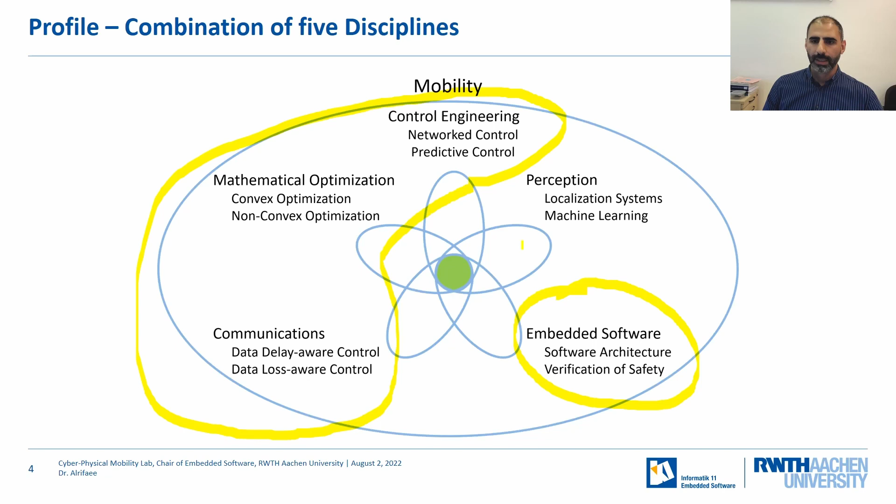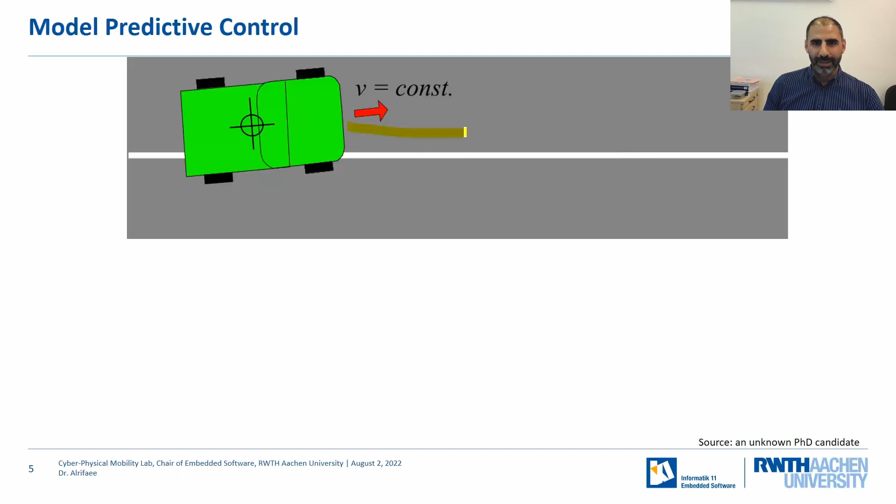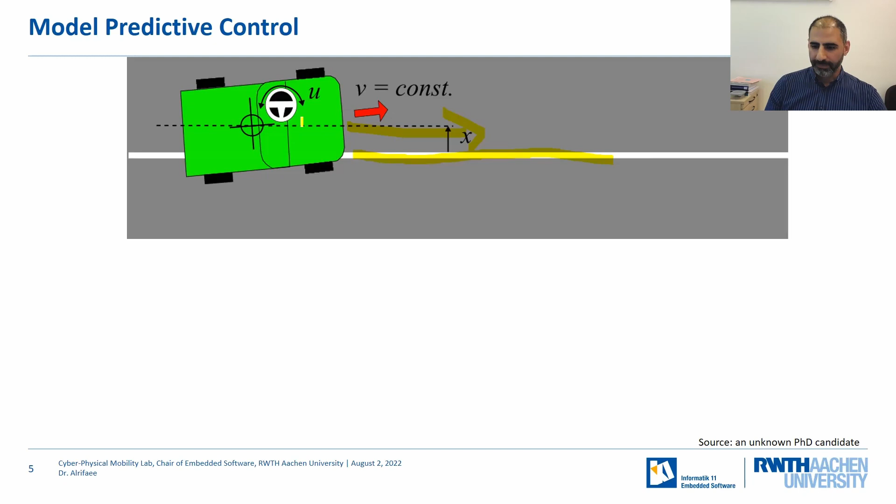Yeah, let's start. So I would like to introduce the idea of model predictive control very shortly to you. So imagine there is a car driving in this direction with a constant velocity, and it has to follow this line. And we can measure the difference between the current position and the reference line, and we can use the steering angle to get the vehicle to the reference. What we can do is classical control or predictive control. In classical control, it is similar to drilling a hole in the floor of the vehicle and looking where we are now and correcting the steering angle.

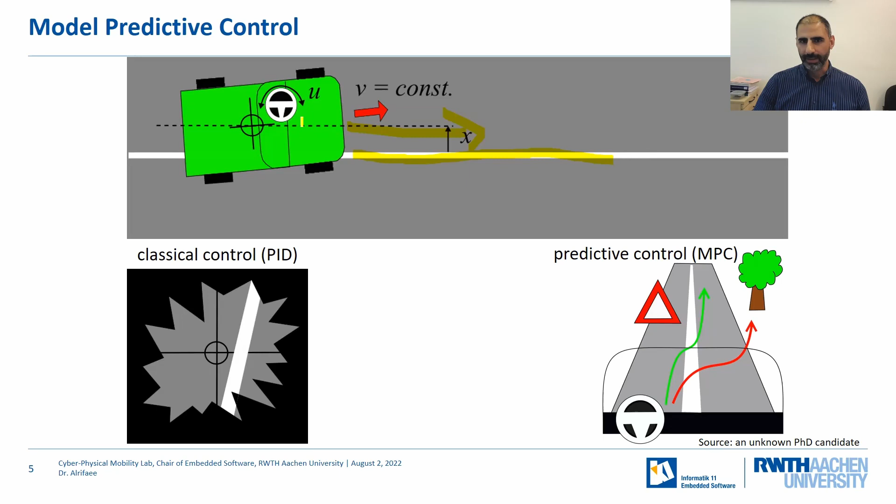And in predictive control, it's more like what we do as humans. We look out of the windshield and we don't drive to the tree. We drive on the lane and we avoid blocked lanes and drive on the free lane. This is a very short introduction to model predictive control. So formally, we have a reference trajectory. We have past measurements, and we use a model to predict the future of the system. And the model is usually a mathematical model. In many cases, it is a differential equation system.

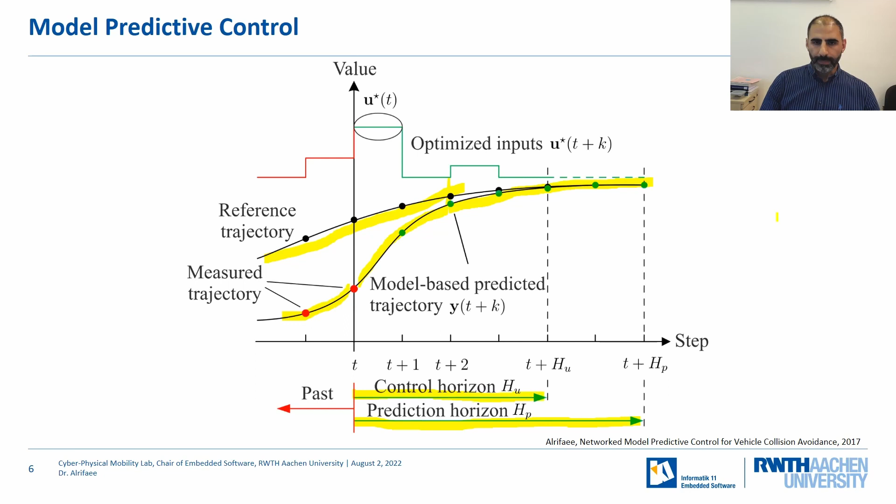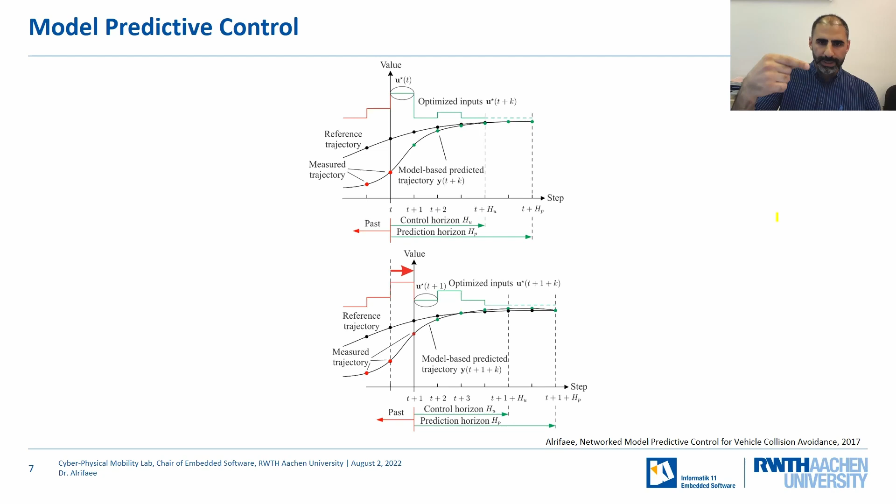The horizon in which we predict is called the prediction horizon, and we formulate an optimization problem and minimize the difference between the reference trajectory and the predicted trajectory using the control input, and we optimize the control input inside what we call the control horizon. What we have seen is an open loop control problem. It is not closed loop control, and to close the loop, we conduct the MPC at every time step.

And I would like to show you now a situation which you know from everyday life, especially after COVID now, in malls or in city centers when they are crowded. Maybe you have seen it, maybe you have experienced it by yourself. Two pedestrians approach each other, avoid each other once, avoid each other twice, and at the end of the day, they may collide or not. So humans are able to resolve such a situation. But how does it work? If you have been to Japan, you can go to the Shibuya crossing and observe how it works in such a crowded intersection.

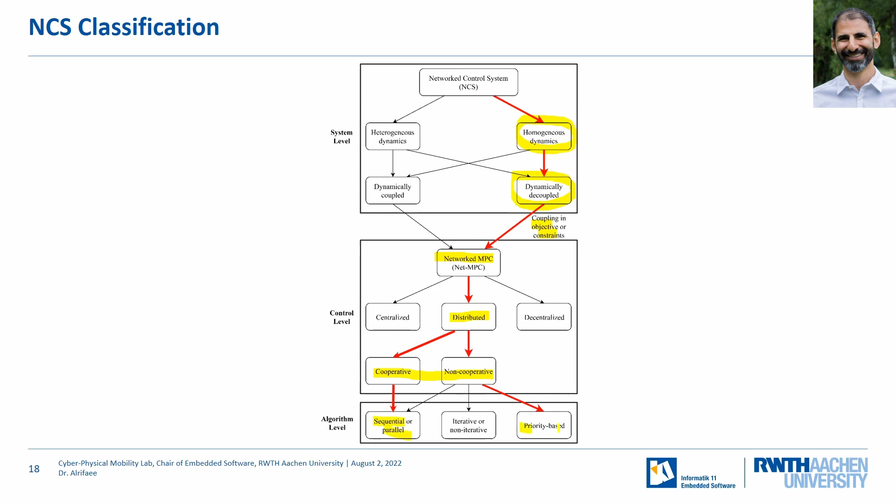So, and we study cooperative and non-cooperative strategies. A note: cooperative and non-cooperative, the terms here come from game theory, and in terms of trajectory planning, non-cooperative strategies also result in cooperative trajectories, but here the terms come from game theory. And we look also on the algorithm level, on different algorithms, how we can get to good solutions.

Now we have formulated the MPC and put the network terms into it. How can we formulate now the optimization problem? We can formulate it as a centralized MPC, where we have a center where we collect the information of all agents, solve the optimization problem, communicate the results to the agents, and they apply. So this is not applicable in practice. It has a high computation time, and we have a single point of failure in the center. Nevertheless, we solve such an optimization problem to use it as a benchmark for comparing different distributed MPC strategies.

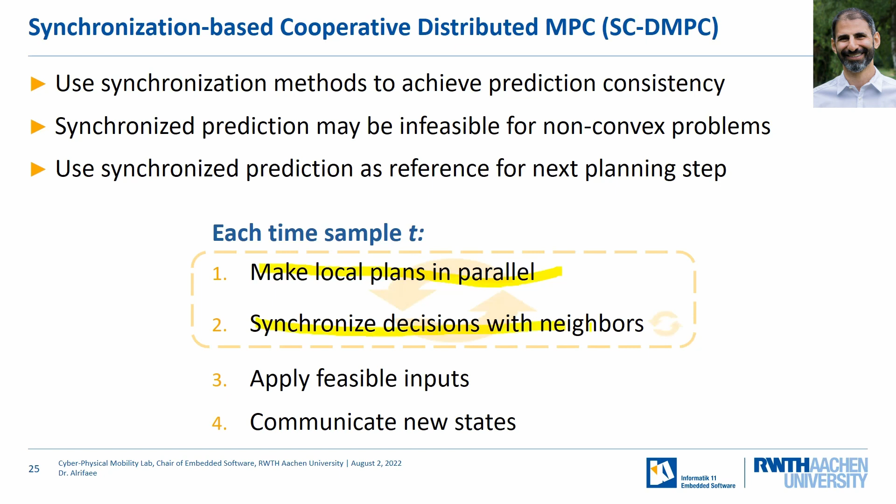Max also studied the graph structure, studied graph properties, which conditions should be fulfilled to get a feasible solution and to reduce the computation time, and came up with an idea of also creating a coupling topology if one doesn't exist, using non-cooperative games. So you can read more about it in this paper presented at the IV this year.

Cooperative DMPC could produce good solutions, but there is also another option which reduces the computation time further, the non-cooperative DMPC. We decompose the centralized MPC into smaller optimization problems. Each agent considers its own objective, own constraints, and the coupling objectives and constraints with neighbors, and they communicate their optimized predictions. So an agent tells other agents, this is my plan, and they use this plan to consider this agent. And this is a greedy algorithm because each agent considers its own objective and only a prediction made by other agents.

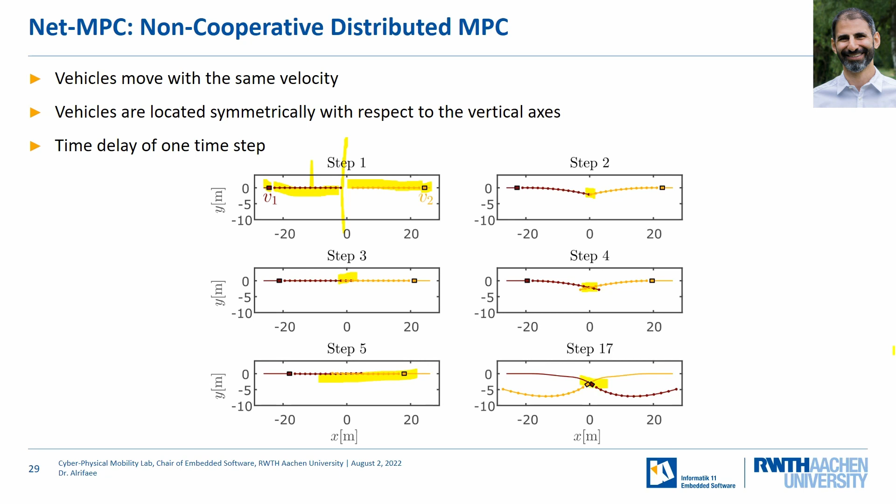What can we do? We studied the graph structure, and we observed that the graph structure of such problems is cyclic. So it contains cycles, which means that we consider exactly the same coupling in both agents. And we showed that cycles in coupling graphs lead to loss of prediction consistency property.

And what can we do to resolve this problem? We can solve in sequence and iterate till we get to a solution. It comes with high computation time. And our proposed solution is the priority-based non-cooperative distributed MPC. I would speak about priority MPC, to simplify this term.

If the network is time invariant, we're done, and we can solve the optimization problems in parallel. But if the network is time variant, we need to solve in sequence, and then we get again high computation time. What can we do to reduce the computation time in sequential computations?

We observed that the priorities generate a partial order. We can convert the partial order into a topological order, and this is only possible if we can prove that our graph is a directed acyclic graph. So we could prove that the graph generated using priorities is a directed acyclic graph. And what can we do with this information? The good news, our topological order is not unique because the graph is not fully connected. So we can use this to reduce the computation time.

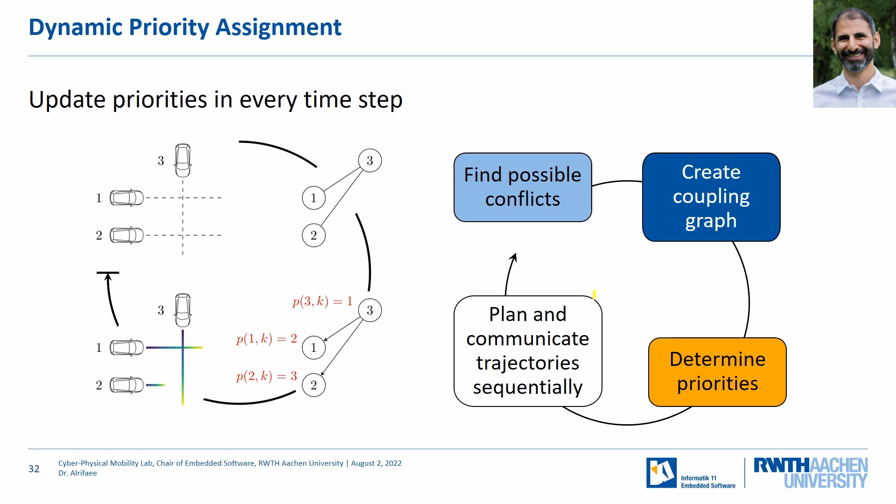And Patrick presented his solution or is going to present it at the ITSC this year. And the main focus of his work is how can we guarantee or study the recursive feasibility of the networked control system. Recursive feasibility means if we get a solution at a time instant t, what can we say about the solution at time step t+1? Can we guarantee to get a solution at t+1? How good is the solution there?

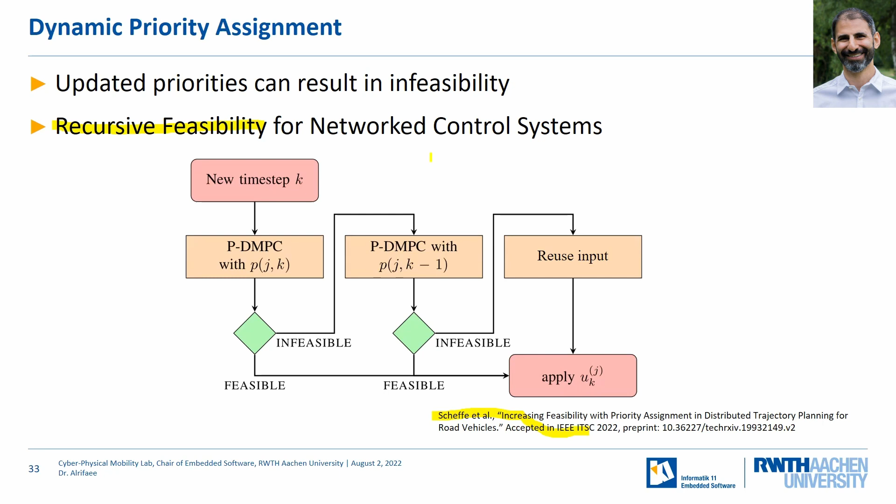And this is defined as the recursive feasibility. The recursive feasibility is well known in the area of MPC. There is the question in a single MPC, I get a solution at a time instant t. Can I guarantee to get a solution at a time instant t+1? And he extended this definition to networked control systems.

Yeah, we found out that we can distribute the priorities in another way to reduce the levels, but also we can redistribute the priorities to reduce the incoming edges. The incoming edges are in the constraints in the optimization problem, and it's well known that the number of constraints in an optimization problem increases the computation time.

So Patrick studied this and came up with the idea of graph coloring, and he proved in his publication, which is still in preprint, that it is equivalent to graph coloring. Graph coloring is a well-known problem, and we can use heuristics from the field of graph theory in our problem.

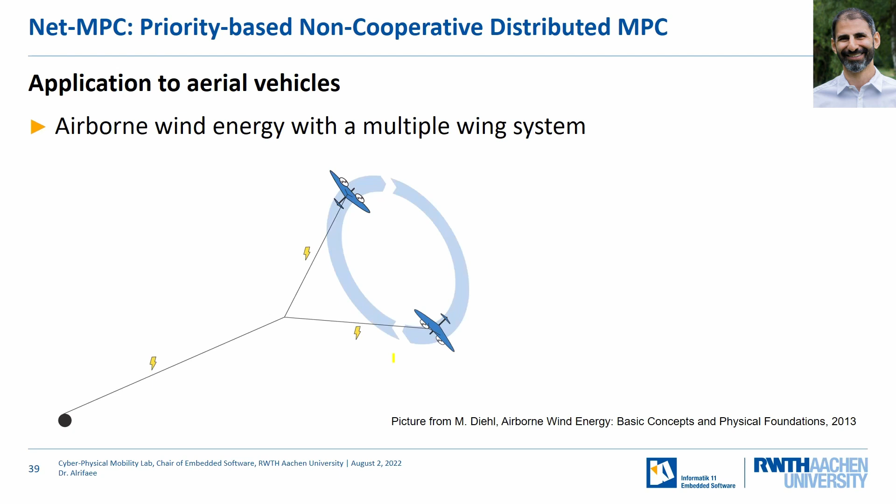We applied it also to the racing of multiple vehicles. This is very exciting because the vehicles have to drive as fast as possible around the racing track, but at the same time, they have to coordinate to not collide with each other. So at the same time, they have to compete and to coordinate. This is very exciting. We have published a paper in the Transactions on IV this year on this topic.

So now it's time for questions. So I have more slides, but I will give you now the opportunity. If you have questions up to this part, I would be very happy to answer them, because after this slide, I'll move on to another topic.

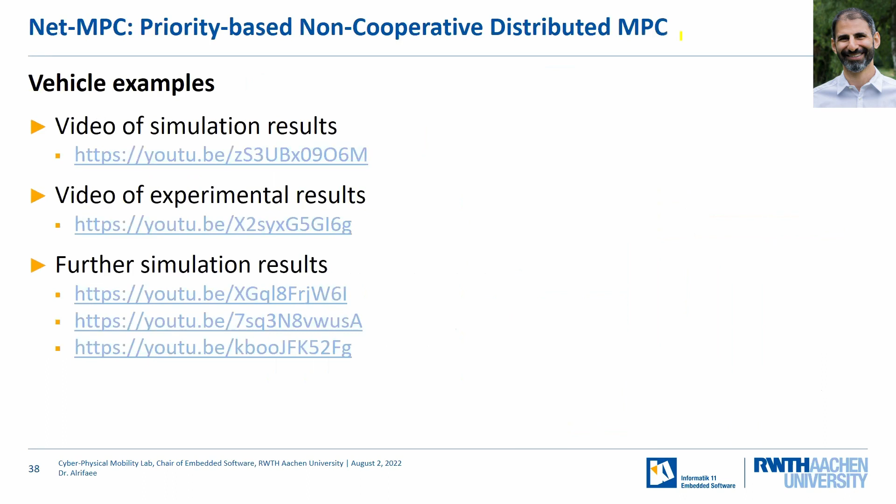Yes, it's a very good question. We asked ourselves this question when we applied it to the crossing example exactly here. We had some rules how to distribute the priorities, and they were dependent on the traveling time, on the velocity also. We assumed that braking faster vehicles costs energy, so we need to give them, for example, higher priorities.

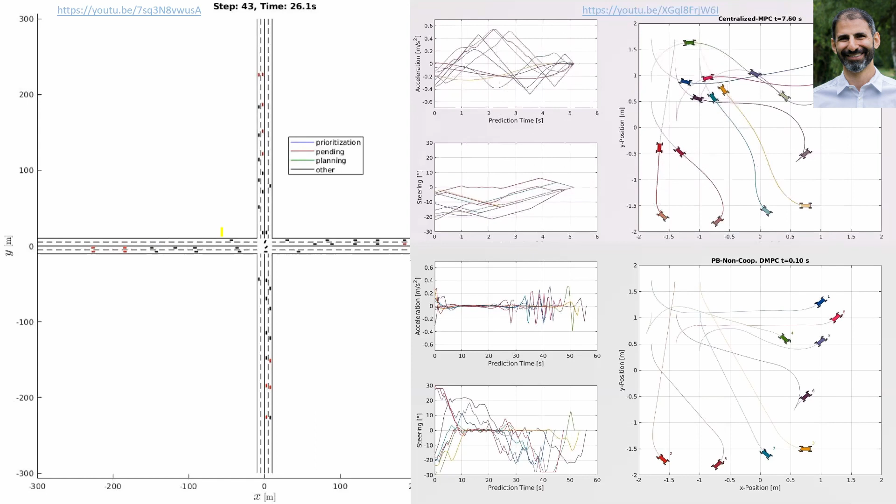Does it answer your question? Yeah, thanks. You're welcome. Okay, you can still ask questions about this part after the whole presentation.

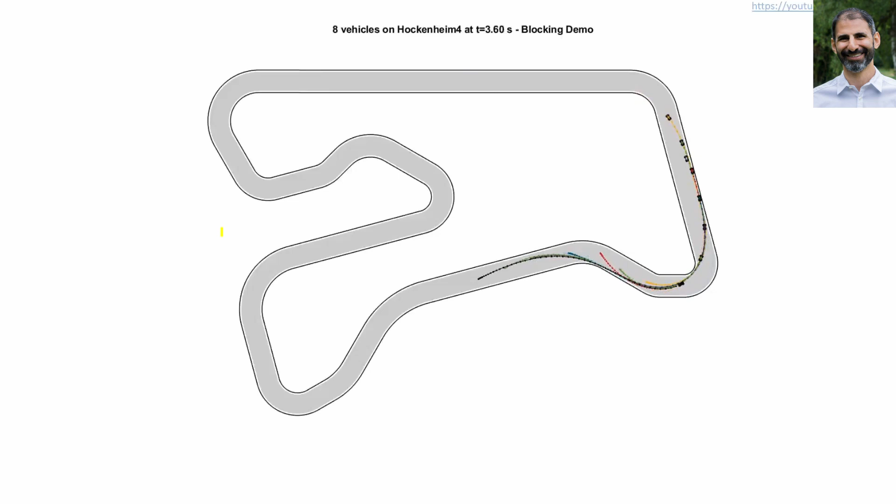And now I'll tell you, the simulations are very nice, but not exciting enough. That was our motivation to construct our cyber-physical mobility lab. We can, of course, experiment in the real world, but it is very expensive, very difficult. You need a fleet of connected and autonomous vehicles, you need a test track, and so on. Simulations are somehow, to be honest, boring.

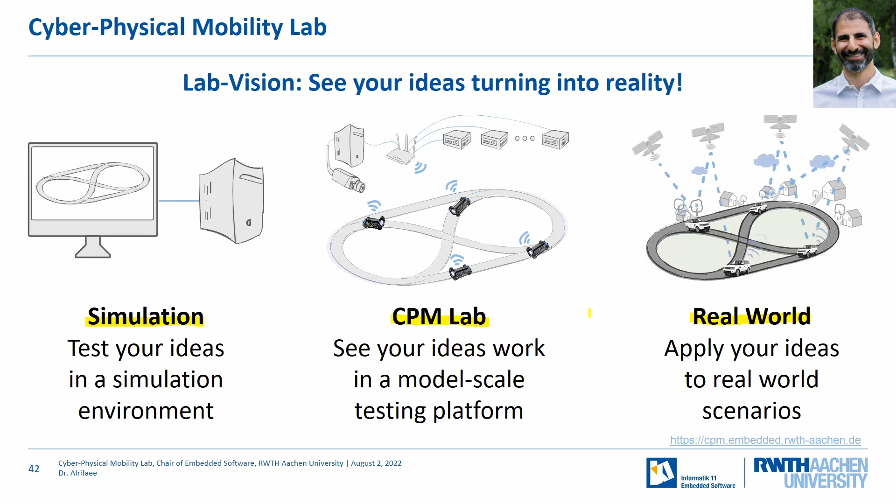So we came up with the idea to have an accessible platform, which we call our cyber-physical mobility lab. It is here in our building, in a room of size 6 by 7 meters, and we drive on an area of approximately 4 by 5 meters. Here I would like to present some of the features of our cyber-physical mobility lab.

So first point, it is open source. From day one, we opened everything: code, plans, documentation, everything is open. We wanted everyone in the world to be able to rebuild our lab. But after some time, we realized that it is really costly. It costs a lot of time, more than planned.

It costs a lot of money to build such a lab, and that's why we started working on remote access to the lab, and now it is available. So our lab can also be accessed via the web. As for the lab, it consists of 20 model-scale vehicles, which we call µCars.

We support centralized and distributed computations in many ways, hybrid computations, parallel or sequential computations. And what we use in our lab is a modern architecture. We call it our hierarchical service-oriented architecture. It consists of a high level for complex computations, a mid and a low level. We use a middleware for data exchange and synchronization, which is based on DDS.

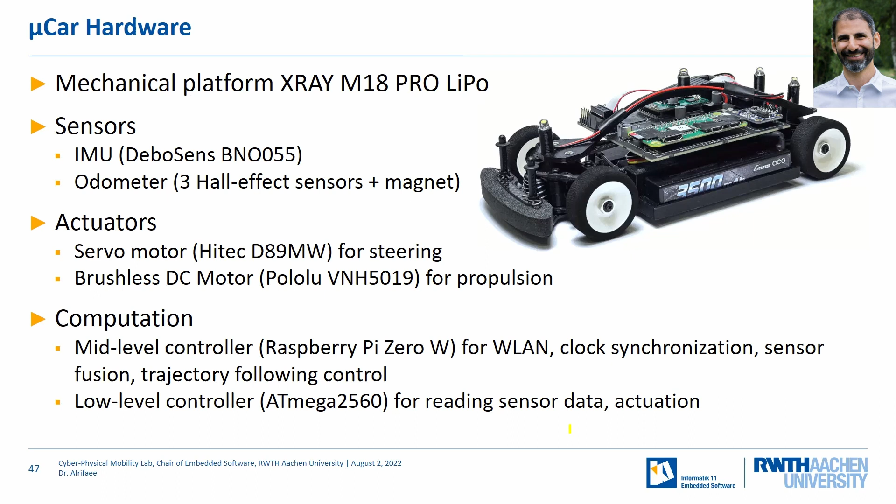So back to the hardware in the lab. This is our vehicle in the lab, our µCar. It is based on an off-the-shelf racing model-scale vehicle. We redesigned it to be connected and autonomous. So here you see where we placed the battery, our servo for the steering, our driving motor. We also designed our own PCB, where we placed our Raspberry Pi Zero W. W stands for wireless, so this is for the communication of the vehicles.

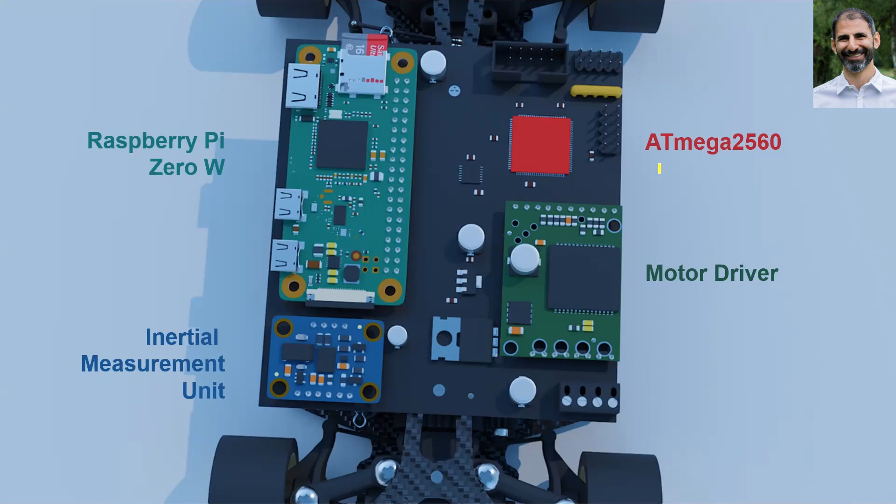We equipped each vehicle with an IMU. We have a motor driver, and for low-level hardware abstraction, we use an ATmega. We also designed a 3D-printed part to place the LEDs on, and we use 4 LEDs to detect the position, orientation, and ID of the vehicle. The outer LEDs are used to compute the positions and orientations of the vehicles, and the middle LED flashes at different frequencies to detect the ID of the vehicle.

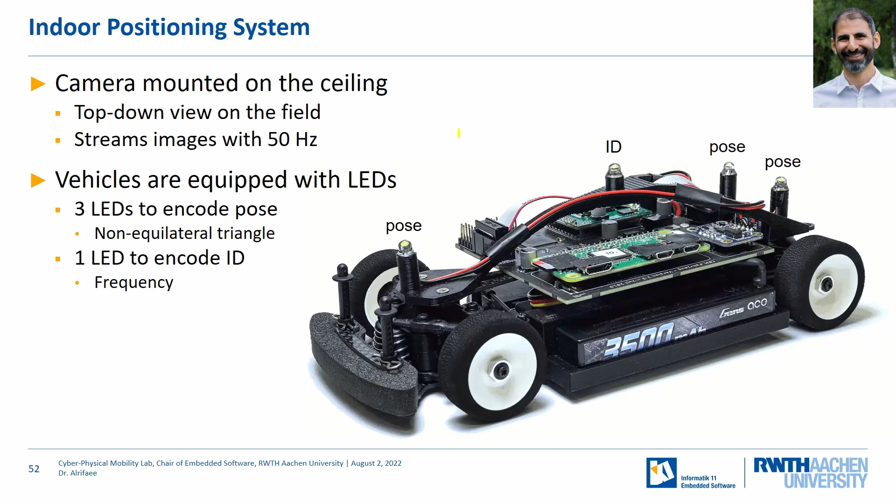And here we see our Hall effect sensors to compute the rotation speed of the motor. We have also designed an indoor positioning system. We have a camera in the ceiling of the room, and it detects the LEDs. It was some work to get it working. You can try to detect here the number of vehicles and their IDs, and which LED belongs to which vehicle. So it is an exciting problem.

And now again, the video I showed at the beginning of this presentation. This video is based on the work of Patrick. The vehicles avoid collisions based on our priority-based NMPC. We have here in our lab this scenario, or this map. We can replace the map. On the outside we have our highway, and here in the middle is our intersection. We also have highway entrances and exits.

The task of the vehicles is to drive safely and efficiently. In this testing scenario, the vehicles are allowed to change lanes randomly, and the next path in the map is also chosen randomly. This is our testing algorithm, and as you see, it works with 15 µCars here. They drive fast and avoid each other.

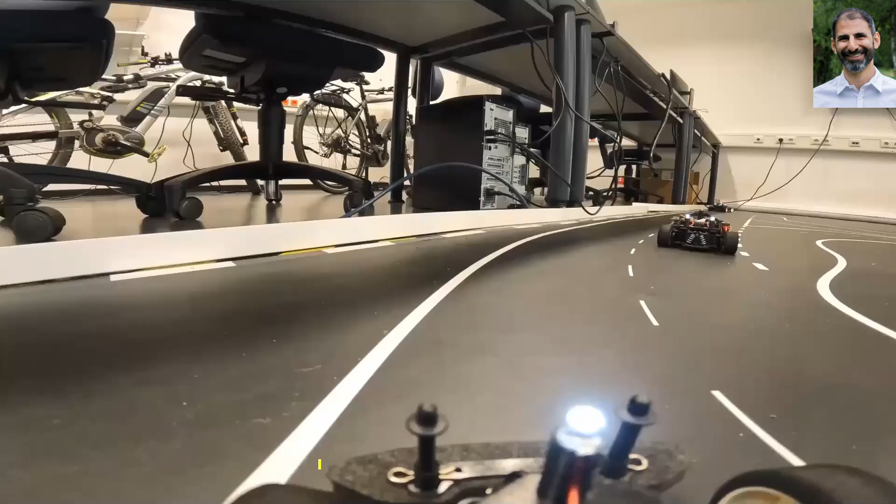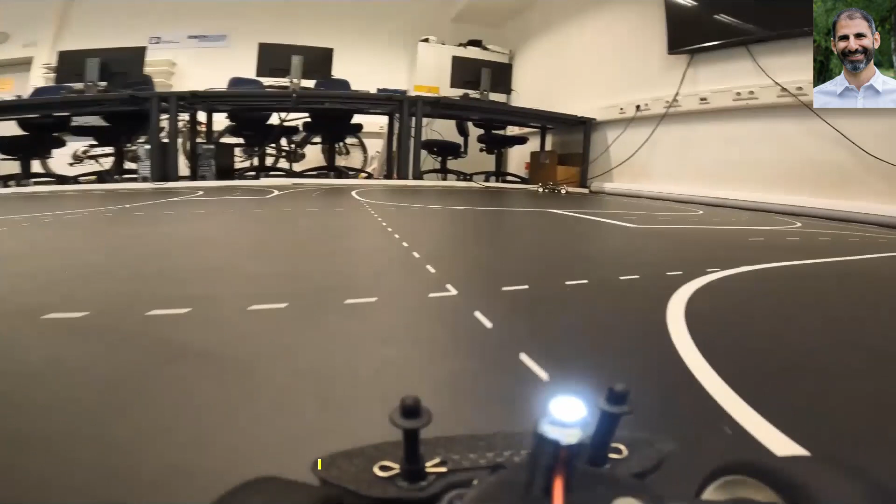How does it feel to be inside one of the µCars? Here you can get an impression of it. It is very fast. You may feel bad looking at this video for long. And we are also using the lab in a project with Frank Flemisch, who presented his work yesterday, to study human factors.

How can we use the lab? We can also use the lab for PR, for public relations. We used it in the anniversary of the 150 years of RWTH, and here you see Ms. Reeves, Shary Reeves. She's a well-known journalist in Germany, and we model scaled her also on our racetrack.

What else? How can we use our lab? We can use it also in project meetings to organize workshops, or also to take project pictures. So here you see Christoph and Oliver, and also Catherine in our lab waving at the camera.

So what do we need to build such a lab? We need sense, plan, act, and also for connected autonomous vehicles, you need a good software architecture to have a platform where you can implement your algorithms. And also we need to consider the humans. So in our lab, we are considering these 3 building blocks: sense, plan, act, architecture, and human factors.

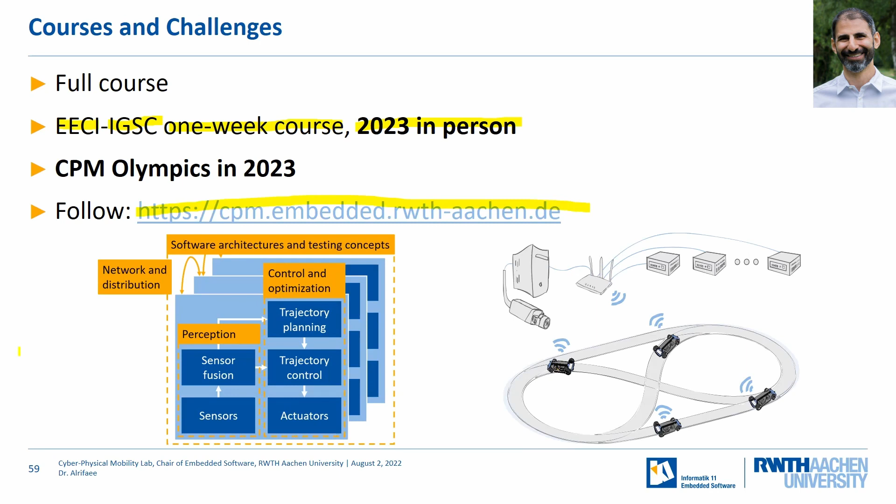Yeah, and now I would like to summarize my presentation. I presented methods for distributed MPC. They are cooperative, and we use synchronization to improve the cooperation and to reduce the computation time and enhance the feasibility and quality. And also non-cooperative DMPC, I've presented the priority-based one, which is the work of Patrick Scheffe. He's around you. You can talk to him today. The work on cooperative DMPC is the work of Maximilian Kloock. He's also around you. Feel free to talk to both of them.

We applied our methods also in applications of connected and autonomous vehicles, and also brought them into experiments in our lab. So what next? What are the challenges? If you are a PhD student in an early stage of your PhD, you may be looking for open topics in this area. I'll mention some of them. So one is to reduce the computation time. Here you can also look at the work of Oliver Brinkman, who is also going to present tomorrow about accelerating the machine learning using special hardware. And here it is a possibility for cooperation.